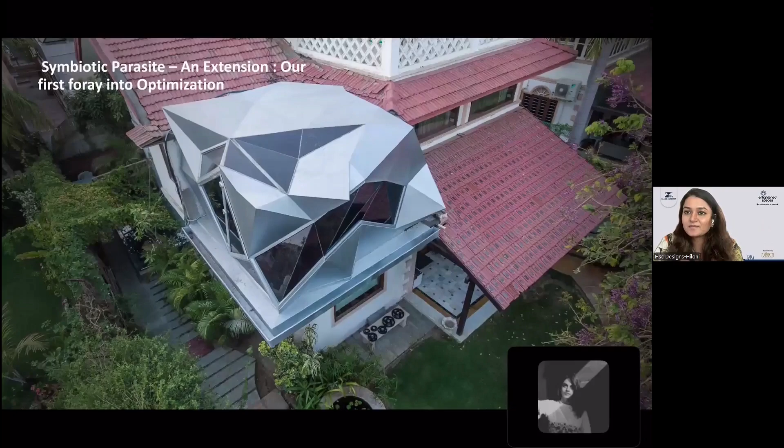So we put in 4 projects which sort of optimize how glass is used, how our spaces are designed according to the use of glass, and how we make it sustainable and make sure that the whole space is optimized by the use of technology, but also by the use of glass.

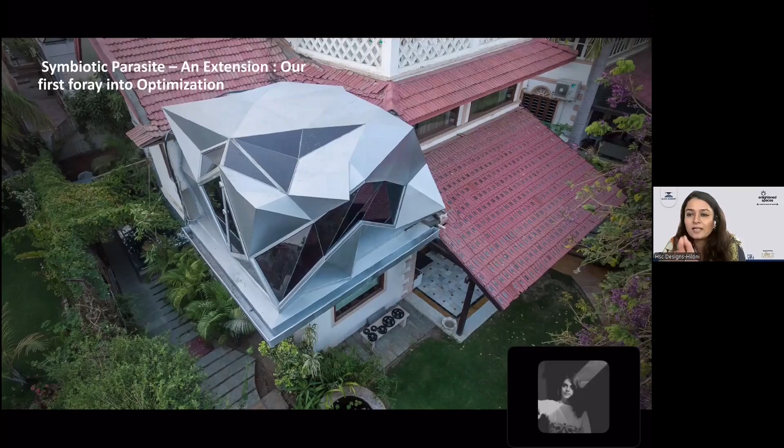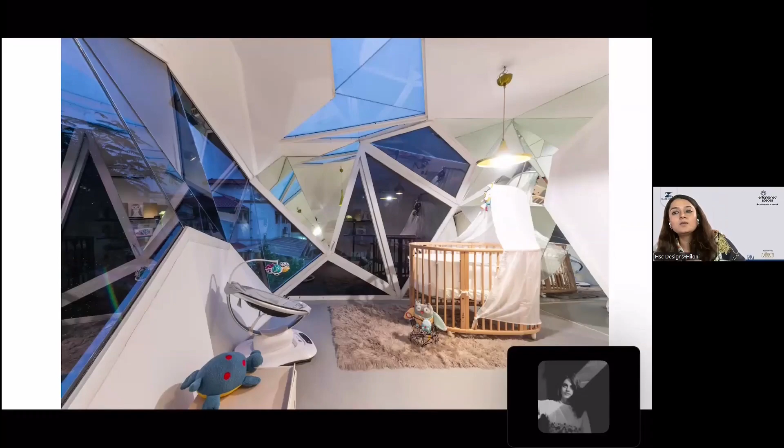So this is the first project of my career, and this was an extension project - a very small 100 square feet extension project that we made on top of a very traditionally built farmhouse. Because this was a very traditionally built house, we wanted to make sure it doesn't take away from the essence of the original structure, but also adds on to it. So we've designed this space in a way where we've modulated the angles of all of these facets so that there is continuous sunlight throughout the day, but never a sun glare in the space.

I'll show you - these are the pictures of the day. And the space was meant to be versatile enough to be a lounging space for a young couple, and then it became a nursery when their family grew.

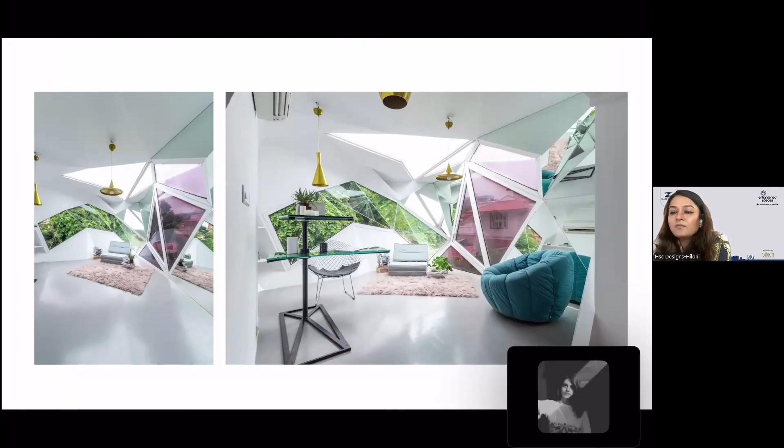The angles of the windows are such that even with skylights and light coming in, there are constant views of the greenery. There's privacy from the surrounding houses, but also continuous angular sunlight throughout the space. The windows are designed for cross ventilation throughout the whole space.

Moving on to the next project. This is the residence I was talking about, where we designed the whole space around their dining table, the dining space being their main meeting space. You can see the whole facade cascading into the central foyer space.

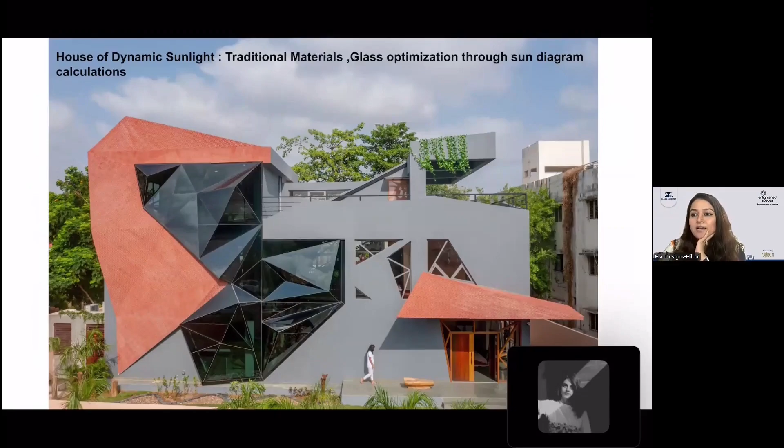Let me go to the interior. This is their dining room where they're getting these beautiful shadows, and this is the space where they get together the most. Around the dining space there's a large foyer which leads to all the bedrooms. Along with the dining area, the bedrooms also have large light avenues where they can constantly get sunlight, but never extreme sun glare.

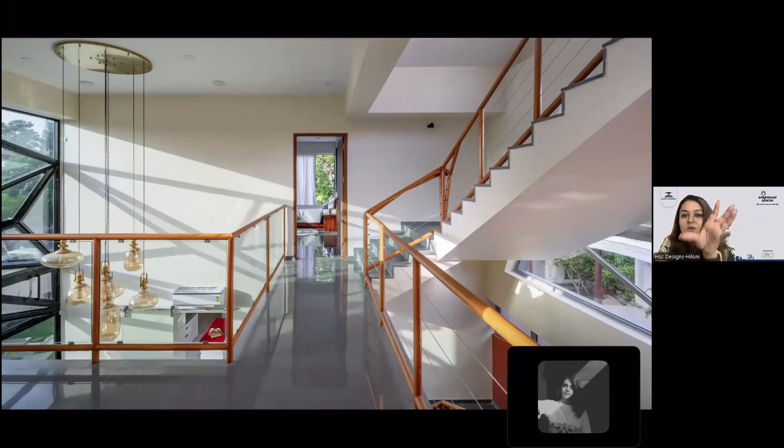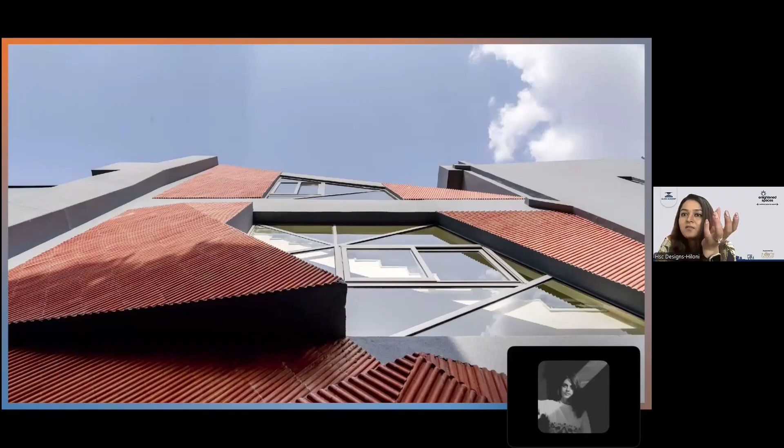Even in this picture, taken in the afternoon, you can see there is very soft sunlight cascading throughout the whole space. The back elevation, since it faces south, is designed so there's shading throughout the whole space. All these facets are modulated so there is shading, and materials like terracotta are used near the glass so there is constant cooling throughout the space.

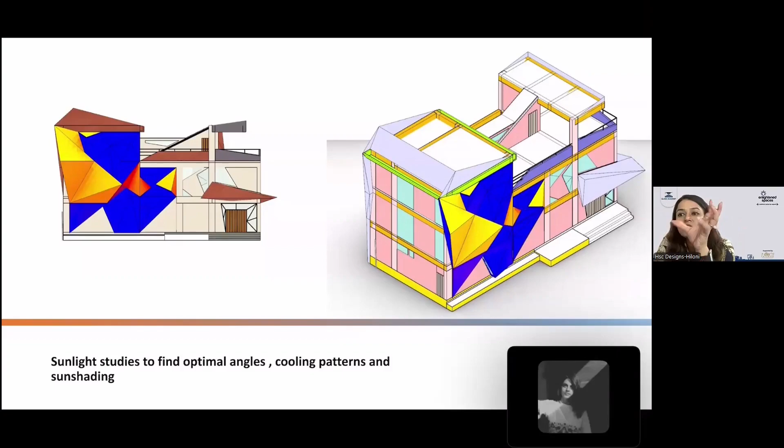These are basic images of how our sun calculations are done, where we make sure the spaces getting maximum sunlight are not the ones with a lot of glass, but the ones with shading. The spaces with shading are where you get the maximum amount of glass.

If you relate this image to that one, you can see how the glass has a lot of shading happening on it, while still getting nice, soft, natural light throughout the day.

Okay, so this is the project we are currently working on. It's underway, and it's probably the most challenging but also the most fulfilling project we've done till now.

It's a multi-purpose healthcare building with a hematology lab and a path lab, where a lot of patients come in with blood cancer, especially a lot of kids. We wanted to make sure the building doesn't feel like they're going into this sterile, boring, elemental hospital space. That was the client's brief—that the space shouldn't feel intimidating for these patients, since these are very serious illnesses being treated there.

So a big part of it is how we make these large framed views into the outside. There's research showing that for mental health and physical healing, you need, at least where you spend a lot of your day, framed views that give a long format view—not just something nearby, but a long format view where you can see at least 5 meters into the distance.

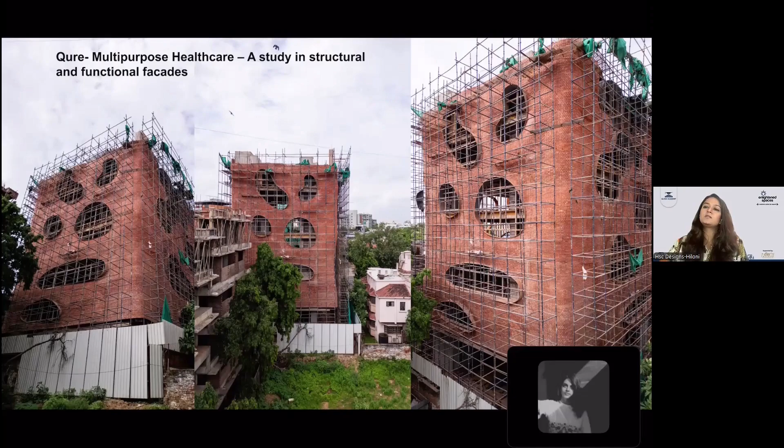The windows are designed so they can essentially see out—larger windows are placed where they can see a lot into the exteriors. Since it's in the middle of the city, in spaces where there's a lot of built form around it, we've given windows that look down, angled toward the bottom rather than toward the building next to it.

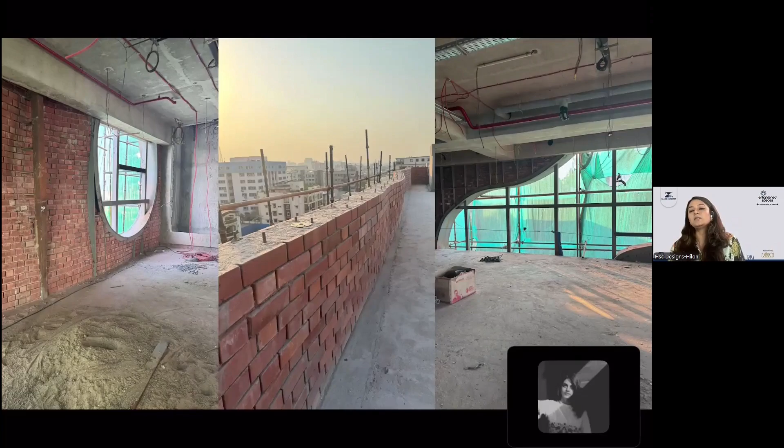These are the internal spaces. Even during hot afternoons, the spaces inside the building are extremely cool because we've used glass in shapes that provide enough shading. Secondly, we've added shading elements, and third, we've used it in conjunction with brick, which also has natural insulation properties.

I wanted to show a quick overview of how we do these climate studies. The curves are designed not just for an aesthetic look, but these curves increase the functional spaces, since it's in the middle of the city.

It is governed by a lot of city rules where we can't go beyond a certain FSI, we can't go beyond a certain overhang, etc. But these curves help us navigate those areas, along with providing shading to the windows as well, so we never had to do extremely big chhajjas to shade the large volume of windows.

We have also oriented the spaces inside in a way that there is the least amount of radiation happening throughout the day, and the openings are designed so that there is enough cross ventilation throughout the whole space. This last project is our office, which is currently under construction.

This space is something where we wanted everything to be at the utmost level. One thing I forgot to mention is this is again the IGBC rules we talked about - this is an IGBC Gold certified building we are coming up with. So we are even selecting glass based on its technology rating, its light efficiency, and its shading efficiency. I think these things also play a very important role in making decisions for the project.

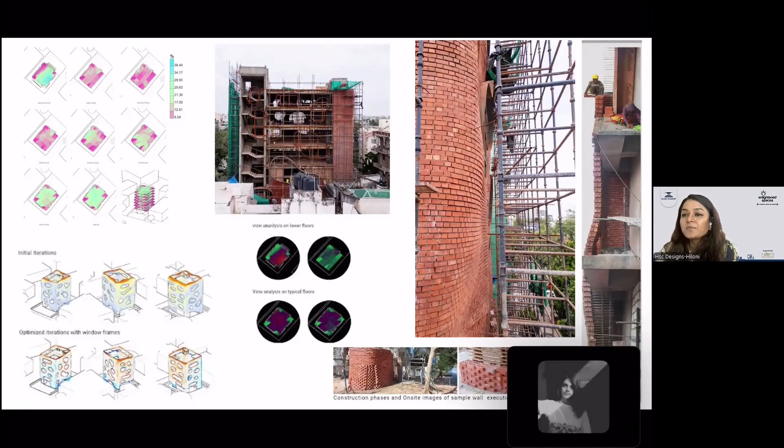Moving on to our office, we wanted to make sure it is a space that encourages creativity, and that makes use of every possible reused material we can, because if we are such big advocates of sustainability, our space should reflect that. So we have used a very simple traditional material like terracotta tiles.

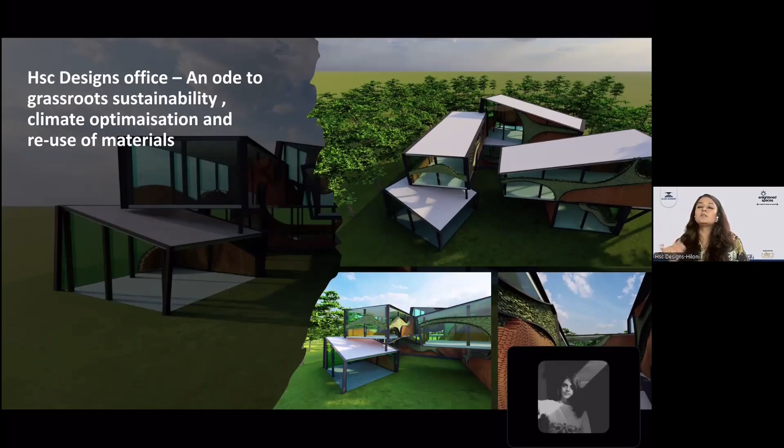Essentially terracotta tiles are used in roofing as a cooling device. How do we use it in the walls? But how do we use it such that it doesn't become a secondary wall - it's a load-bearing primary wall. So we're coming up with tech to make sure the terracotta wall stands as a load-bearing primary wall, and how we use it in conjunction with glass and greens to ensure there are views throughout the day, but also enough cooling throughout the day.

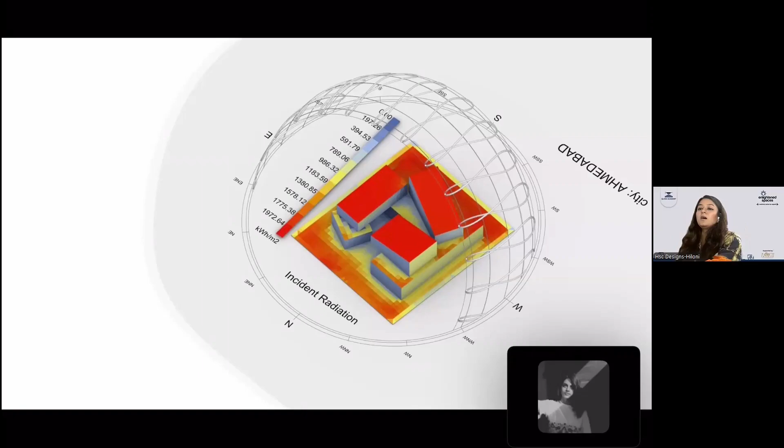So the form of the building, the glass, everything has been determined according to our radiation studies and sun calculation studies, and we've come up with a methodology where there is glass in a very unique form, but it's also continuously shaded through these terracotta tiles.

So I think this is the end. I've put in four projects to give a gist of the extent of the things that we do, and how every project has its own specific requirements and how we make sure each of these specific requirements is adhered to - residences have something different, offices have something different, and healthcare spaces have something different.

When we tie all these ideas together, along with ideas of what materials we can use and how we can use glass so these materials are given 100% justice, I think that's when we can come up with something sustainable - but sustainable doesn't have to mean going back to rudimentary ways of living in a hut. It's about how you use technology and new age materials to make something sustainable.